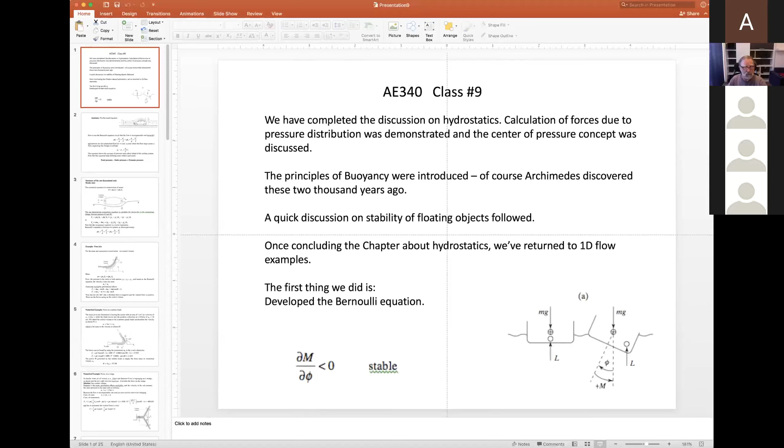So this is a brief summary of what we did last time. Hydrostatics, we finished. And we did buoyancy, which is very similar to what you had in high school. I mentioned that Archimedes figured that one out 2,000 years ago. So nothing dramatic. Then I had a quick discussion about stability. I think it's more important than meets the eye.

But in case of a floating object, the interesting part is like I'm showing it down here. Where's my cursor? Right here. Once, say, the boat tilts, the center of pressure moves to the right of the flotation center because the area is changing. So even though it appears unstable because the center of gravity is above the center of flotation, it still is stable. And that's why all those ships are working.

The typical terminology is you decide about a moment direction and an angle direction. So let's say this was theta, I called it phi. This is phi, and this is the moment. So if you increase phi and the moment keeps on increasing, that's unstable. But if increasing phi, the moment is in the opposite direction, like it is described here, then it is called stable. And it's of course logical. I showed that to you with the towing wheel, like the supermarket cart wheel. Okay, so that was kind of a side remark.

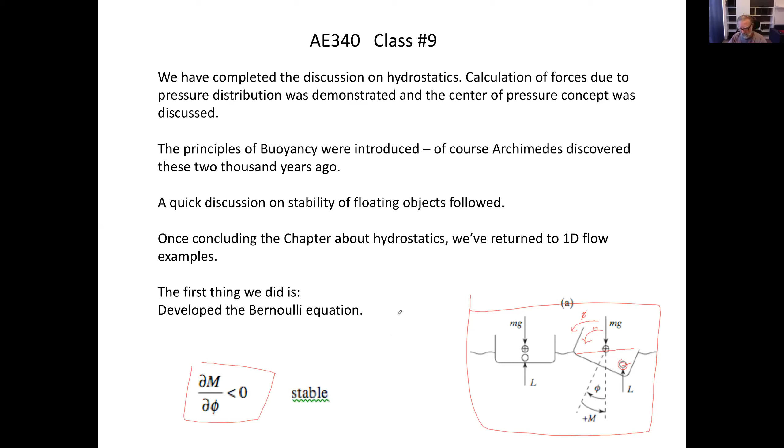And now we're moving back to the one-dimensional flow. And the first thing we did is we introduced Bernoulli. Everybody's using Bernoulli, everybody's quoting him, and many are using it wrongly. So I tried to develop it more carefully. Let's go to the next slide. So first of all, we assumed that it is true, for example, on a streamline. But the main thing is that there are no friction losses. So if there are no losses, and the flow is incompressible, which is true for water, for air.

Now the inviscid is no friction. So we can show cases when definitely there is no friction. In that case, we have to pick 2 points and compare these quantities, and then we can generate the relation which is called the Bernoulli equation. So one example, of course, was when we took a point somewhere. Let me see if the pen is working. Let me get the pen.

So we take a point somewhere here, let's say far away. To the car, it appears that the flow is coming at it at the speed of u infinity. And then we pick another point here, and because the flow is going around, it has to be faster. So if it is faster, then probably the pressure will be lower based on those relations. In this case, the height is almost the same, so the gh term will not play a significant role, basically we're going to neglect that. So this is a typical example.

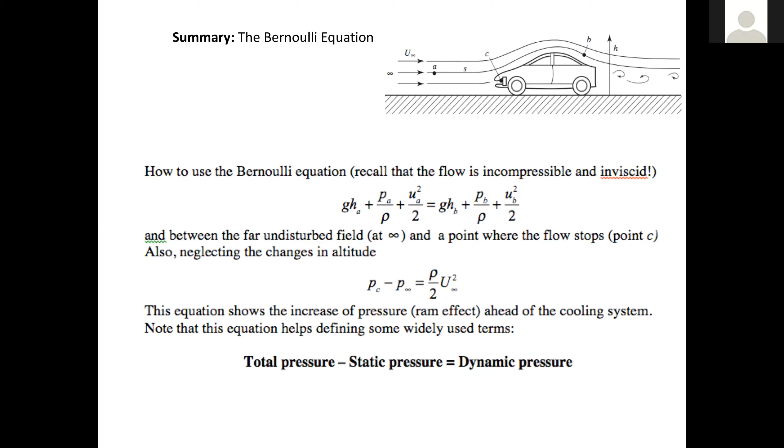Yes. Okay. Let me see if this is going to, okay, it works. I had a little problem with probably the internet or something.

It didn't work well. So here's a summary of the one-dimensional model. Before, we developed the continuity and the momentum equation, and we said steady state. We decided we're not going to make it too fancy. We stay steady state, and we took a control volume like that, and the continuity says whatever goes in comes out. That's the continuity, and we try to keep it one-dimensional: goes in, goes out. And then the momentum.

Momentum is momentum coming out, which is this, minus momentum going in. And if there's a high pressure here, then it's pushing to the left, and if there's a high pressure here, it's going to push to the right. That's what these terms are; I have to take them into account. If you look at the mass flow rate, which is rho UA, momentum goes with the square of the velocity, so it's the mass flow rate times the velocity. That's very much the momentum you discussed in high school, momentum out minus momentum in. Same with the pressure. And now we added the Bernoulli equation, which is a third equation.

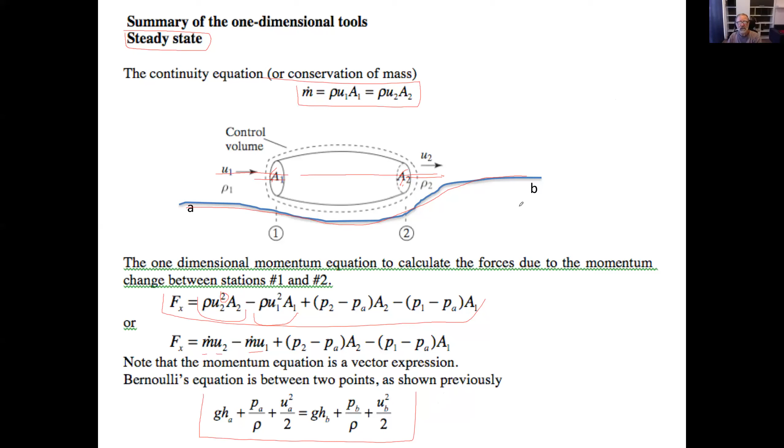Okay, here we go. So the first case that works, you can play with that. It's very similar to basic dynamics. It's a free jet. So you have a free jet and you blow on something and you're trying to change its direction, but the change of direction is smooth. So let's say there's a ramp and they're trying to change the direction smoothly. So now definitely there are going to be forces. So let's see how we can deal with that.

So the gray is the jet, and we surround the fluid. Actually, we can surround the whole thing with a control volume. My pen is not so great. And we're trying to see the changes. We pick entrance one here and exit here. So clearly the flow is incompressible, and the mass flow rate in is equal to the mass flow rate out, no doubt about it. Looking at the picture, there is nothing outside, so the pressure must be the same at 1, at 2, and outside.

So if the pressure is the same, and we go back to Mr. Bernoulli, and we neglect the little gh increment here, because the jet has much more momentum, then Bernoulli tells us that if the pressure is the same, the velocity must be the same as well. So now we know that the velocity in and out is the same. Therefore the cross-section area of the flow must be the same. Okay? So once we decided that, we just simply take the forces.

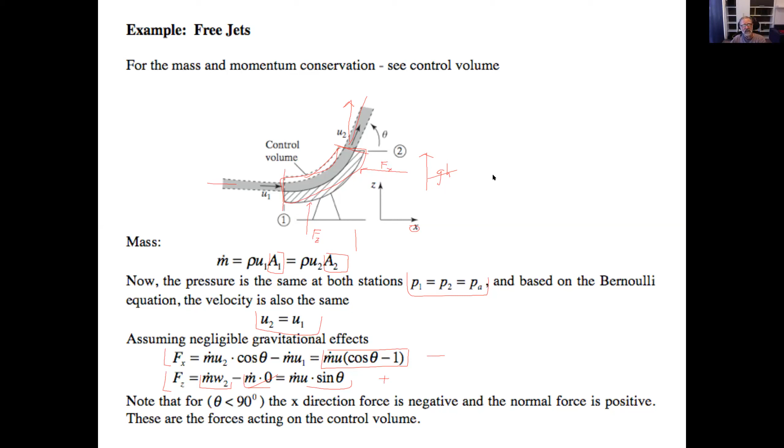Okay, so now I can do some examples. Let's do an example and see if we understand. So here are two tricks that we can pull. The first trick is that

let's say here, I touched it. I'm afraid, yeah, of course it's going to move. Of course it's going to move. Pen.

Okay, so here's the situation. We have a turbine wheel with this vane on it. The turbine wheel is moving, and the jet is coming at it. That's the jet, this one here. Now, the linear velocity of the wheel is 10 meters per second, but the jet itself is 15 meters per second. So the relative velocity is actually going to be 5 meters per second.

We have an area here of 1 centimeter square, and the angle is 120 degrees. We want to know the force pushing the turbine wheel. Like we said before, it's cosine 120 minus 1, times the density of water, the relative velocity, which is the velocity relative to the structure, times the area, because this is mass flow rate times velocity, and mass flow rate is rho V A.

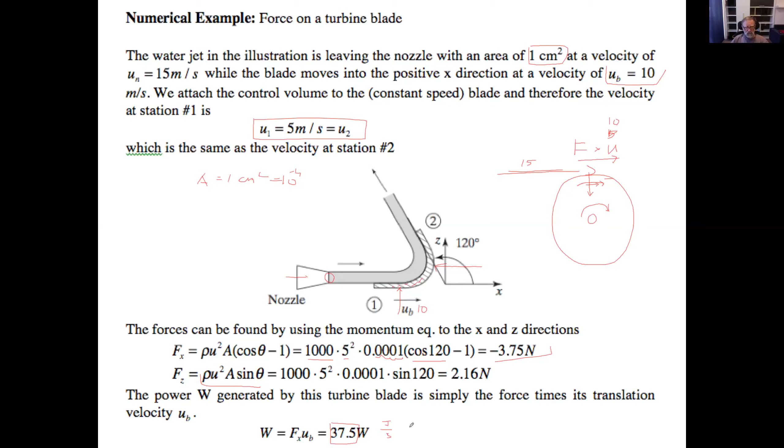What is the power generated? The power generated in the inertial frame we're looking at is F times velocity, which I call U. The velocity is, sorry, 10, not 5. So U_B, the velocity here, is 10. And the force is 3.75, therefore the power is 37 watts, or joules per second. Very simple. We just use the same formula and see how it works in terms of numbers.

Here's another one. We have a wedge, and we're spraying on it, and it splits the jet into 2 equal parts. We can go through the same exercise, and of course we have the control volume. Let me just get the pen right. So this is the control volume.

Okay, so it goes in and goes out, here it goes out. This is the angle, theta, which is 60 degrees. And we can go back to the same formula we developed before. So the flow comes in and it splits equally, okay? Same argument we had before: the pressure is the same, therefore the velocity is the same. So the velocity here is the same velocity, which is 15, as the velocity going in here.

Okay, and the area here is actually the same as these two areas combined. So same argument. Therefore, the force in the x-axis is going to be equal, I did it twice, like 2 times the half. But actually, what is coming out is this, and they both look the same. So rho u squared A and cosine minus 1. Here it is given that the diameter is 0.1. So therefore, pi D squared over 4, and it comes out minus

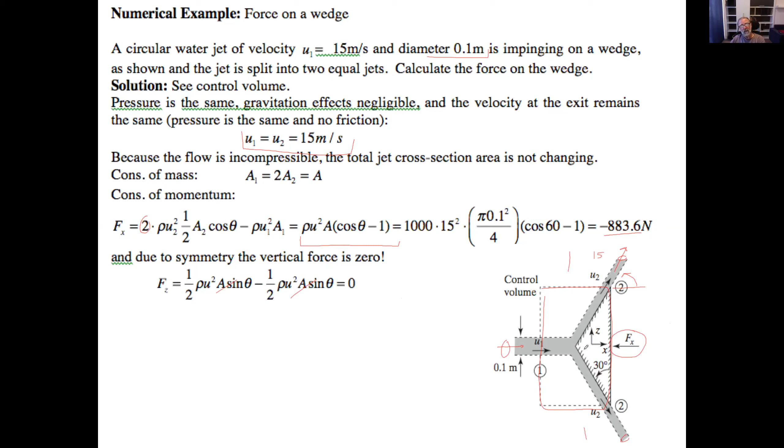Okay, one more. Let's make it a little bit more complicated.

You guys still with me? Anybody make a noise? Yeah. We're still here. Still here. Loud and clear, Professor. Good. Okay, so, all right, and I see attendance went up to 120, so we're in good shape. Okay, so

we have the same story I had before, but let's be more specific. Let's say this is an airplane engine. I hope civil engineers don't mind this example, I apologize to them. It's a good example that you can actually simplify things. So we have a jet engine, and the flow comes in. It didn't come out very nice. It comes in, and then we can call this area A here. And the area at the inlet is actually larger. We call that AI.

AI, and so on. So the same way we can come back and say the force Fx is going to be whatever goes out at the E section minus momentum going in, and we assume the density is the same, which is incorrect for an airplane, but right now let's just do that. Again, you can change that and it's going to be correct. So we're not doing anything wrong. And then the pressure at the back, and the pressure at the front. Okay, so same formula.

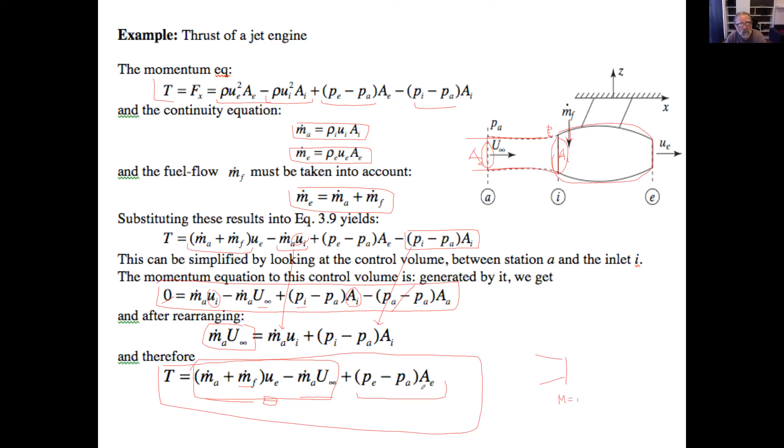Okay, so that's just the story. But this is to show that you can go to higher levels with the simple one-dimensional model. Let me continue with examples. Now, I try to put examples where we use Bernoulli. So here we go. Let me get the pen before it jumps away from me. So we have a container. And we open a little hole here, and we are wondering... point one here, and outside as the jet leaves, point 2.

And unless there is lots of friction here, we can claim that here's a path where the fluid particles go, and they actually accelerate, and there's not much friction. If you buy that, then we can write down the Bernoulli equation for these 2 points. Now, the pressure here is PA. Here is also the pressure PA, so we automatically lose that term. And then H is representing H1 minus H2, so this is H. Oh, sorry, I wrote it down to H.

And then at point 1, the velocity is 0. So this term goes away. So we end up with this. So the velocity at the nozzle exit is the square root of 2gh. What is the force? Rho U2 squared A. Error. Okay, here we go. And this is exactly free fall from high school. So pay attention, I made a mistake here, I forgot the square. Can I move on? Anybody? Yes, Professor.

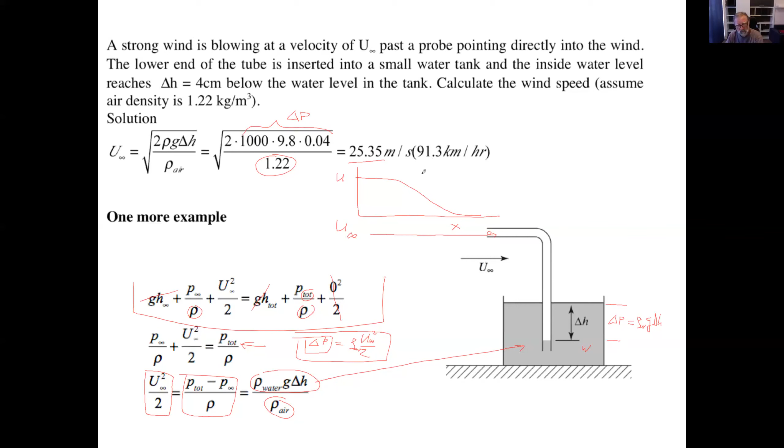Local discussion, okay. So I multiply by 3.6, turn it into 91 kilometers per hour, 55 miles per hour, something like this. Okay? Move on. Another one. So I'm just playing with the frames of reference. Before, we've been stationary in the air, or we've been moving into the air. And now in this case, we are stationary, but the air is coming from outside. So anyway, it's the same story.

So we have a wind tunnel, and in a sense, what I'm doing here is a pitot tube. And I'll come back to the pitot tube in a minute. So we look at a streamline. I touched it again. That's it, we lost it. So pay attention to what I'm doing, okay? This is a straight streamline which is going to hit that tube, and this is a straight streamline which is going to go here, almost close to the wall.

So there's no friction, and then the pressure here is going to be, what did I call it? P, I call it P. So the pressure here in the test section, where the velocity is U, is the same pressure picked up by that port. At this port, the velocity is 0 because it's stationary. So, but then what we have, the velocity outside U is also 0.

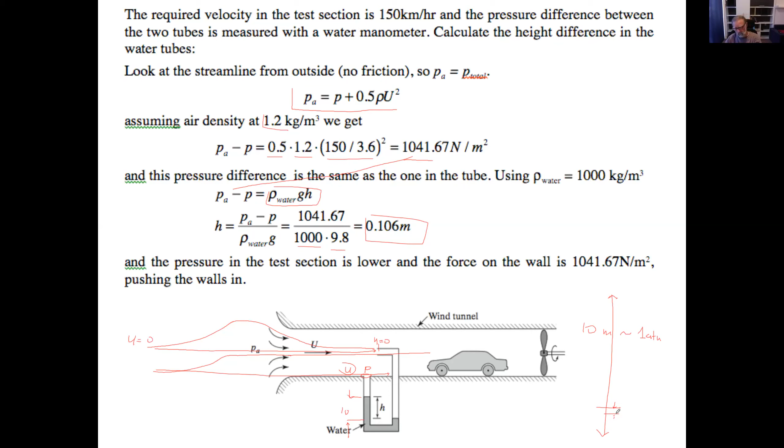For atmospheric pressure changes, they used mercury. So some of those U-tubes still measure the air pressure, for telling if a tornado is coming or not, telling the weather. I think it's 76 centimeters or so of a column of mercury. So it's the same story. Okay, I'll move on. That was the one about Bernoulli. So you got that one.

I have a whole bunch of those where I'm trying to confuse you, so let's see if I can. This is very similar, but I'm changing the area. So here's the streamline that we're looking at. There's no friction. It has 0 velocity. Inside it has high velocity, then it has 0 velocity because it stops. So if I would do this, then I would end up with the same result, because I can stop the air here or here, and it's still going to be the total pressure.

Are we good? Yes, Professor. Okay, I just want to make that point, because I can put pipes anywhere in that system, and it's still going to be the same. Now, here the velocity is slower at this point than here. So I can have the static measured here or here, and you're going to get different results. Right now it's in the large diameter. So if I take the total pressure minus the static, I will have the velocity at this section. Is it clear?

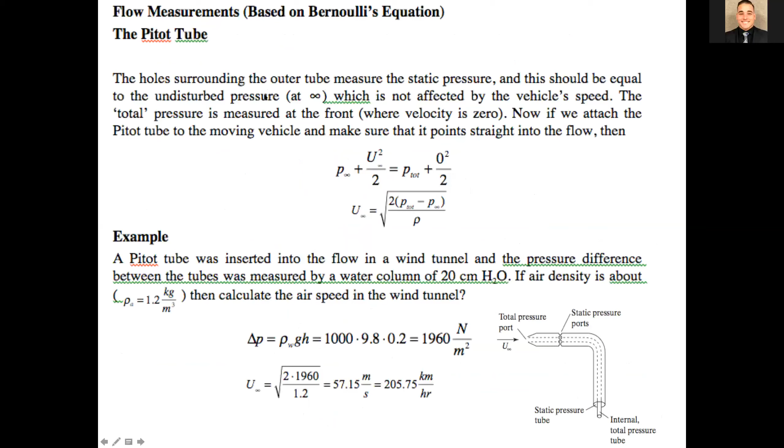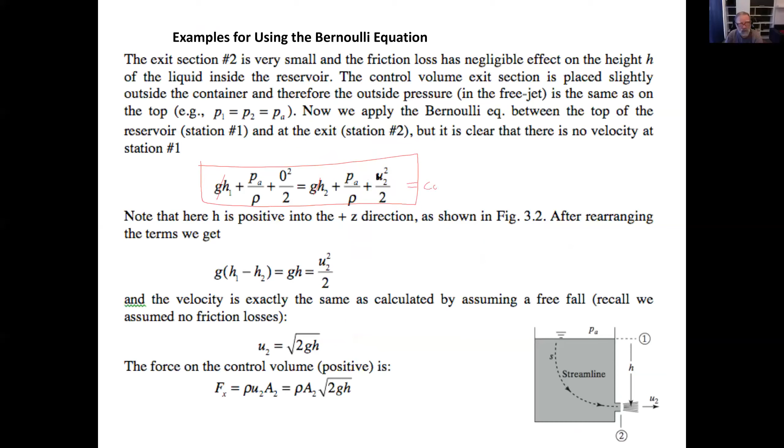This equation, GH is the same, and therefore this is a constant. That's how we started. But we compare that with 2 points. Remember? Yes, okay. I do. All right, okay, so go back. So it's the same equation. And I just did that and then moved everything to the other side, okay? So same equation. And this is that.

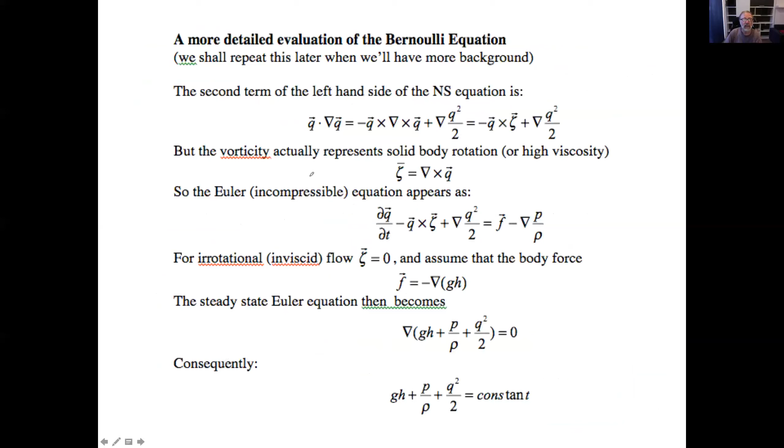And now the velocity 1, because we assume that there's a streamline here and there's no friction. There's no friction here. And therefore, we end up with this equation here. Now, I would like to replace U2 with U1. So I go continuity, and therefore the velocity here, U2 is faster by the area ratio because we assume density is the same, incompressible. Substitute this one here. I end up with that equation. Very, very simple.

Rearrange it a little bit and solve for the velocity. And if I want to have the mass flow rate, which is going to be rho UA, substitute U1 here. This is the velocity. And then in this particular picture, I measure P1 minus P2 with rho GH. Sometimes we use the same fluid. So delta P and this rho are going to be the same. Okay, so that is the formula for the Venturi flow meter.

And you actually translate that to the area ratios. Area ratios, we call it contraction. Mass flow rate based on the contraction and on the pressure signal you get here. It's a very simple device, works pretty well and fairly efficient. Now, this is a device that is being sold commercially, okay, for pipeline flow rate measurements.

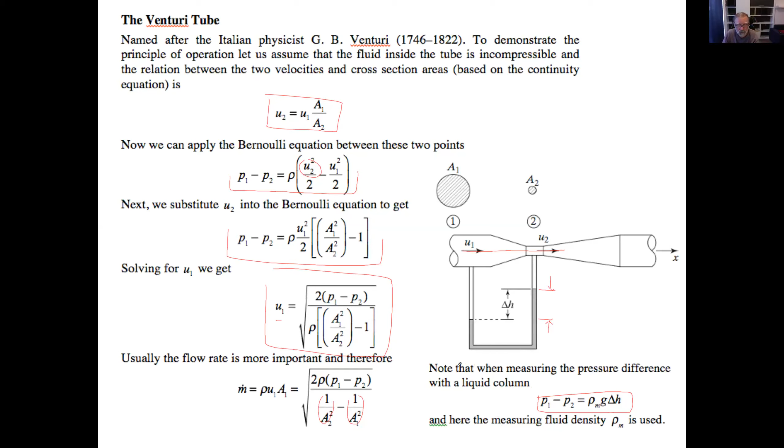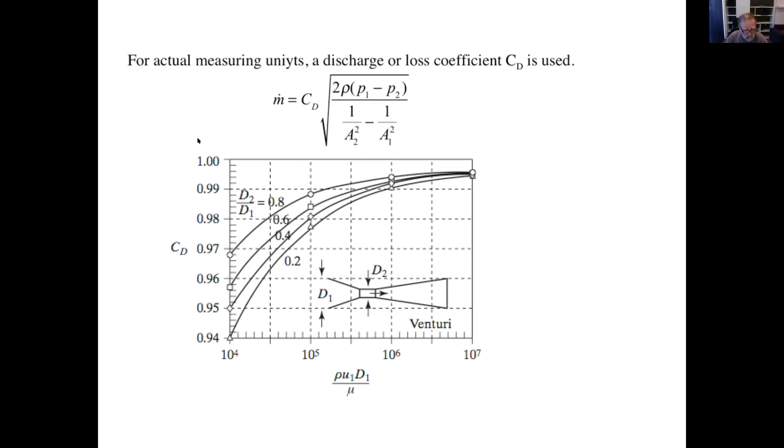Professor? Yes, sir. Question. Okay, go ahead. Quick question. So number 2 on the homework says the cylindrical container shown above, and there's no image above. So is it referring to number 1 or? You're talking about homework, which one? The homework that's due this Thursday? So what number is that? Number 3. Stop share. Oh, I think I got it. Never mind. You have both pictures under number 1. I found it.